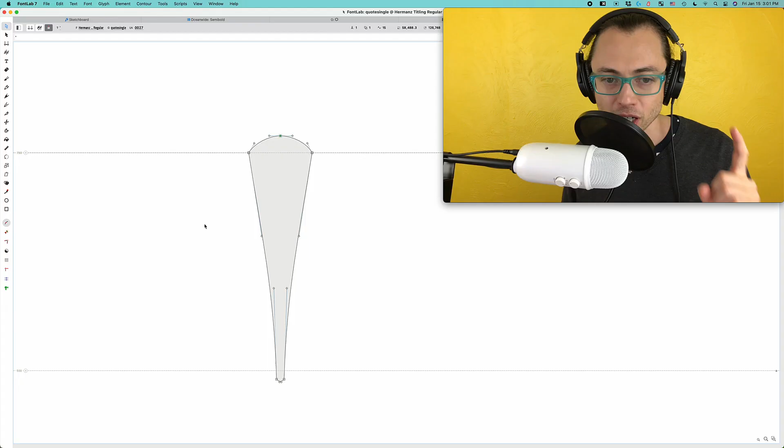Now, I like to have it with the curvature comb, which is this orange thing over here, and that helps me make sure that I get things about smooth. Number two, if the connection is sharp, you can hold down Option and then move between two handles. And this leaves the positioning the same. So I hold down Option and then I click on this and it will move in between each of those.

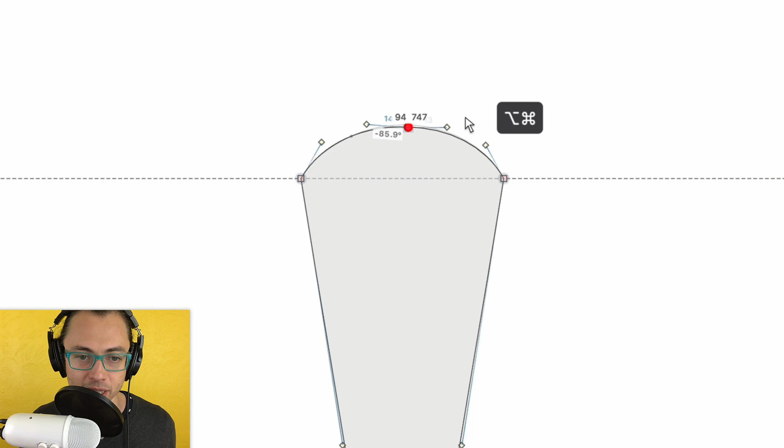And number three, if the connection is smooth, then if you hold down Option and Command, you can move it along like this and it's going to keep it optimized as far as curvature goes. So you watch, if I move it around, it's trying to make sure that the combs are as close together as they can possibly be.

Number four is very similar to the last one. This time instead, you are going to hold Option and Shift, and then you use this to slide it. The difference between this and the last option is the other one optimized the curvature to make sure it was smooth. This one optimizes the shape to make sure that the shape is staying the same. See, if I pull it up and I go up here, the shape is still staying about the same.

If you have multiple masters and if you have diagonal nodes, you know that it can be sort of a pain and you can get kinks in things if you don't have the same proportion of the handles in every master. So this is one way that you can get that. Okay, hold down Shift and Option, then click on the node and you see you can slide it down here. And if I move it down here, see the curvature is still staying pretty good.

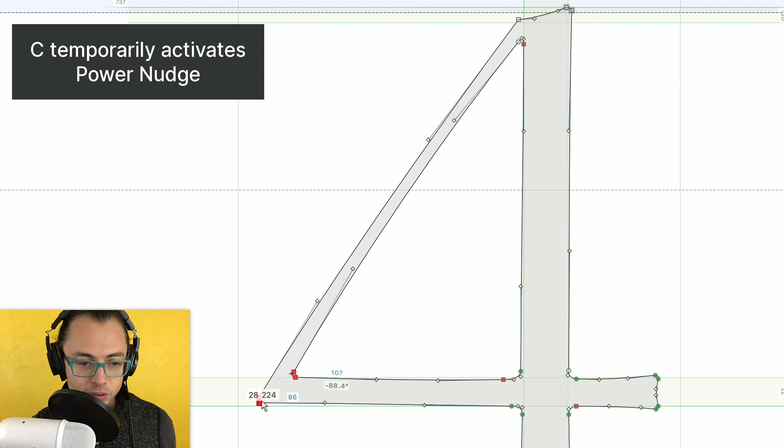Five, power nudge and proportional nudge. And actually one of the best ways to see this is with the number 4. I had mistaken these two for quite some time. I wanted to show you if I take this end here, and this is a common problem with the 4 that has a lot of different handles and things going on. So if I hold down C and then I move this over, see how the top gets too thin over there. So that's not working quite right. And for the longest time, I used that.

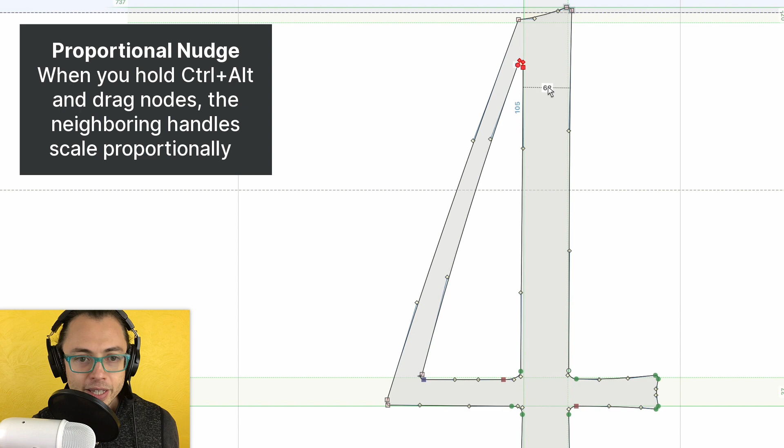So what I'm going to do is highlight these two and instead use Control and Option, hold those two down and move it over. And you can see that since things are moving proportionally over, the top is a little bit squished. So I'm going to have to move this down using the same basic idea, but it still keeps the basic proportion. So now I'm able to make that change without this getting quite so messed up. So that is proportional nudge, and you do that by holding down Control and Option.

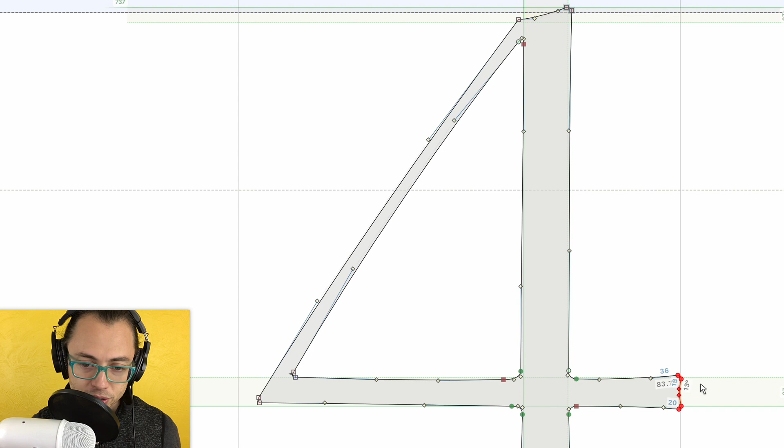If you're going to use power nudge, that's a bit better for things that are a little bit more straightforward. So I push C and Shift, and then I start moving this over. Notice that these nodes on the left adjust because I'm moving the right over. So if I actually wanted the nodes on the right to adjust, I would have to highlight just about everything else. So I'm going to hold down Option, click on everything, and move that over.

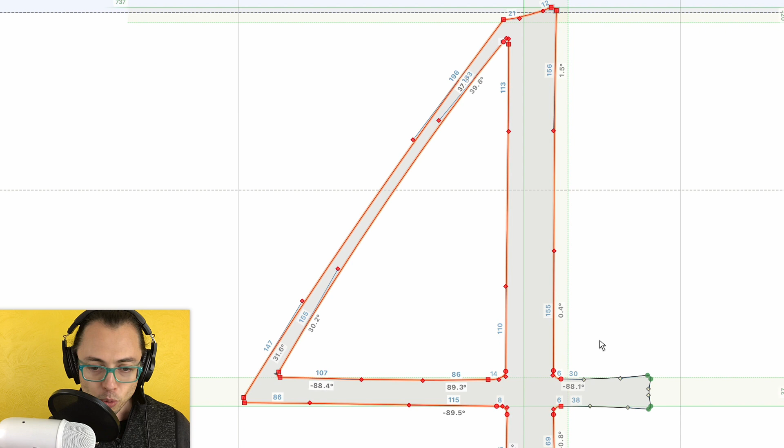I'm going to hold down C and then power nudge it the other way. And you can see that now the other side is the one that is moving. And why is this one not moving? Probably because it's a smooth node here, and it's the way that these are aligned with power nudge. So power nudge is great for moving big things right or left, and for these diagonal sort of things, proportional nudge is going to be better.

Okay, let's talk about handles a little bit now. So if you've been working on a font, you may have had the thing happen where this is not all the way exactly vertical. So how you can tell is one thing, this is a brighter green where it should be a darker green if it's going to be the right or leftmost node. So there's a couple ways that we can fix this.

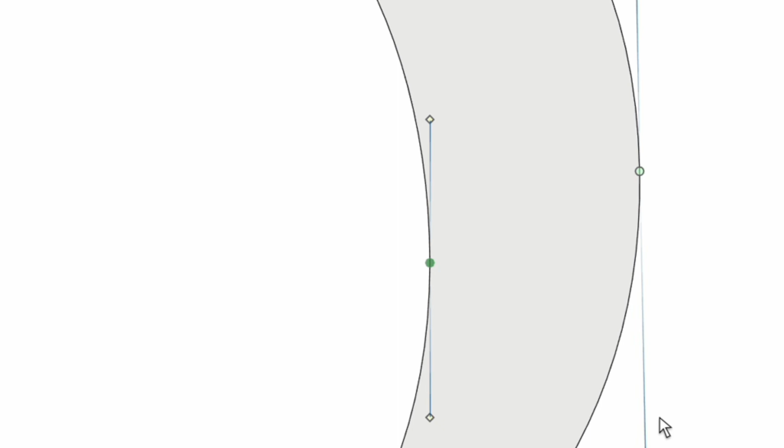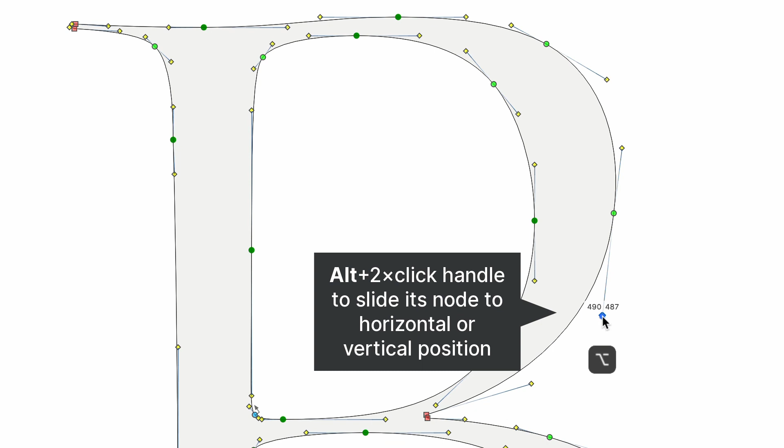The first way, hold down Shift and then double click on the handle. Okay, now another way to do it, you can hold down Option and then double click on the handle. And you have to sort of watch my hands closely here: first click on the handle. Now start moving it and then hold down Shift, and then that's going to get it lined up just correctly there.

Okay, some other great things that Shift can do besides making things align, and this also works for the vertical stuff. If this is off, hold down Shift and you can bring it back down. So if I hold down Shift, now this is a little bit different. If I hold down Shift first and then I click on this, then it's going to make it go in approximately the same angle as close as your grid will allow.

7, more precise moving of nodes. This one is great. It's great for laptops, anything where you have a smaller screen but you want to be very precise. So what you're going to do is hold down Command, or Control on PC, and when you move it, you can move very slightly. See, I'm only moving by 1 unit, even though I'm zoomed a fair ways out. That is precise node movement.

Okay, let's talk about how to move bigger segments. So obviously I can click on a node and then I can just move it however I want, like this. Now that's a little bit imprecise and it's difficult to get things exactly where you want. So one way to do it is to nudge using the keyboard. If you select all of these here, I can push right and left arrow, and the whole thing is being moved by 1 unit.